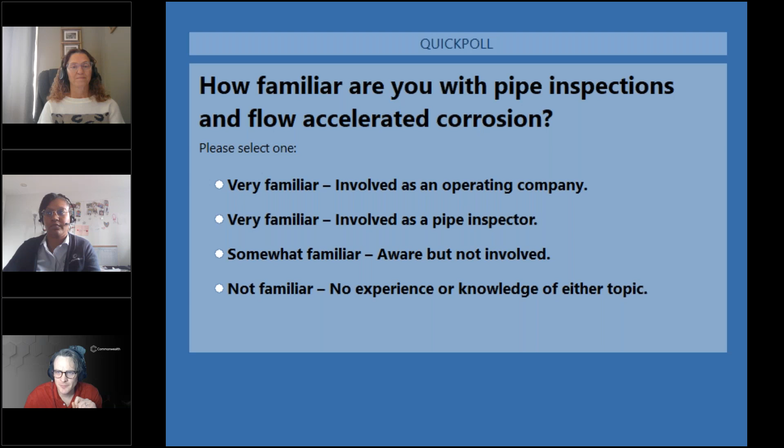With about 76% of our vote, we are going to see our results. We've got about 64% at number one, with somewhat familiar. They're aware, not necessarily involved. 32% of our audience is not familiar, no experience, no knowledge of either topic. 5% say they're very familiar, involved as a pipe inspector, and 0% saying that they're involved as an operating company. So we have a good crowd. This is going to be a great presentation for this audience.

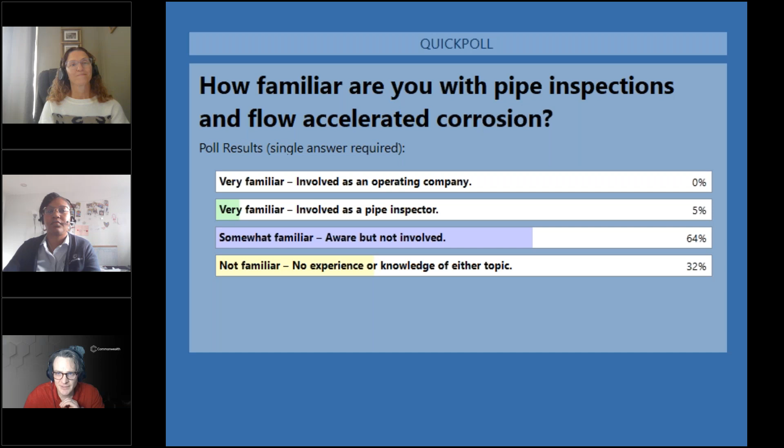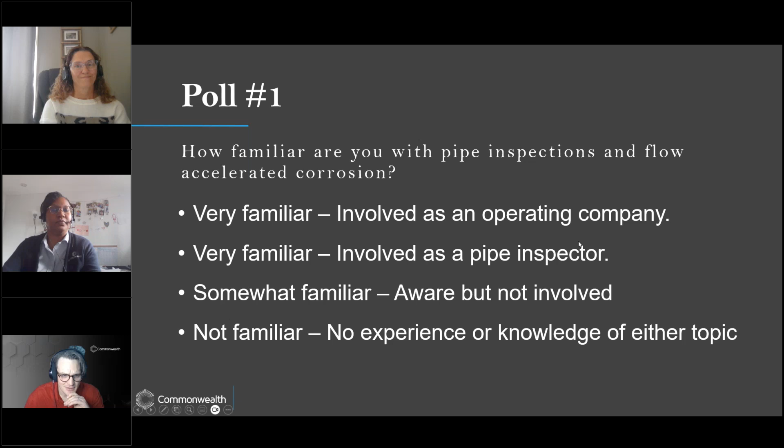I'm looking forward to hearing from Kenya and Kristi. All right, so Kenya, oh, sorry about that. We've got it coming right up to pull up the presentation here on the introduction slide. Okay, there we are. Take it away. So yes, Kenya McKinnon. Hello. Could you do a quick introduction? Tell us, even just what's on the screen. Just say hello to the group here.

Sure. Hi. My name is Kenya McKinnon, and I am a mechanical engineer, oftentimes a project manager in our power generation department here at Commonwealth. I have 18 years of experience, mostly in CHP and combined cycle gas plants. Thank you, Kenya. And Kristi.

And I'm Kristi Vilminot. I'm the Director of Engineering for our Power Generation and Energy Group, as well as our Electrical System Studies Group. I am a mechanical engineer by degree. I have a little bit over 33 years of experience in the industry, ranging from small plant betterment projects up to large combined cycle and coal design projects. I also am currently the chairman of the ASME B31.1 Code Committee, as well as the Vice Chair of the ASME B31 Standards Committee.

Thank you. I'm looking forward to you sharing your knowledge about this committee and pipe inspection in general. So with all that said, I think we're ready to go. So I'm going to hop off my camera, save you all some bandwidth, and Kenya, take it away. Okay.

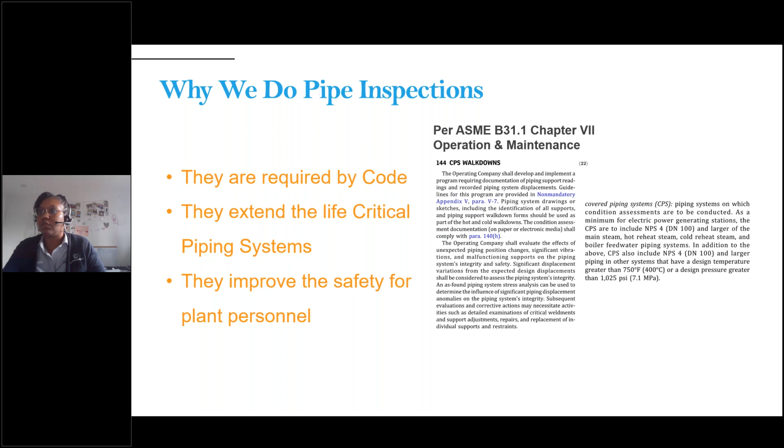Okay, so why we do pipe inspections. Pipe inspections are mandated in the ASME B31.1 code, particularly in the Chapter 7 operation and maintenance portion. And this is, of course, because of safety primarily. Managing safe piping services begins with that initial project concept and design, but it doesn't end there. It's essential that operating companies maintain safe operation of the piping throughout the life of the plant. So therefore, pipe inspections are crucial. Also, identifying issues early extends the life of the critical piping systems.

I wanted to note here that B31.1 does not state a detailed set of operating and maintenance procedures that covers all cases for all plants, but does provide some basic requirements for what they call covered piping systems. So it is up to the operating company to develop procedures for piping systems deemed necessary for safe operation of their facility. And therefore, there could be additional systems beyond these basic ones covered in the code that would also need to be inspected. And Commonwealth is involved in helping clients to develop those procedures.

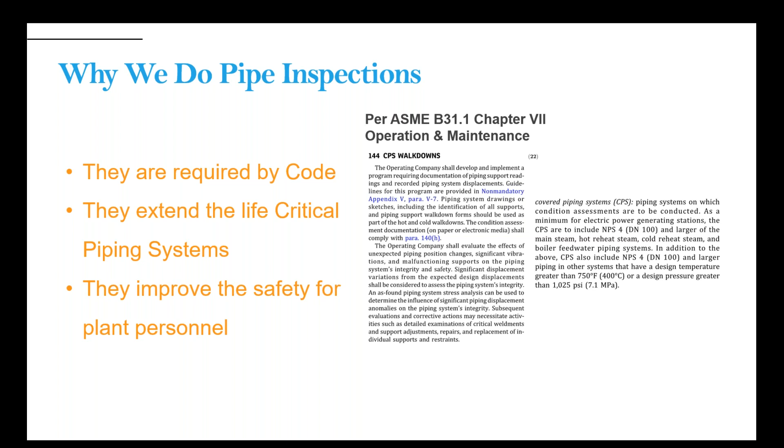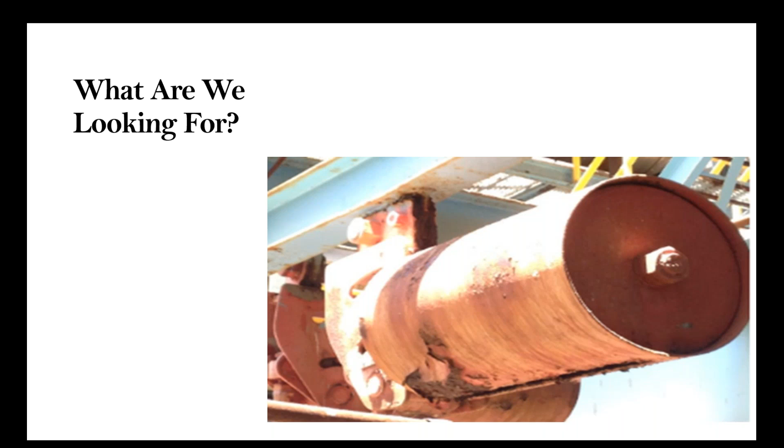The functionality of the support, that could be ensuring rigid bottom supports are resting on steel and not uplifted, and also ensuring rod supports appear to have tension in the rods. The migration of the piping, it's just making sure that there's no unexpected piping position changes, such as piping shoes sliding off steel or bent rods.

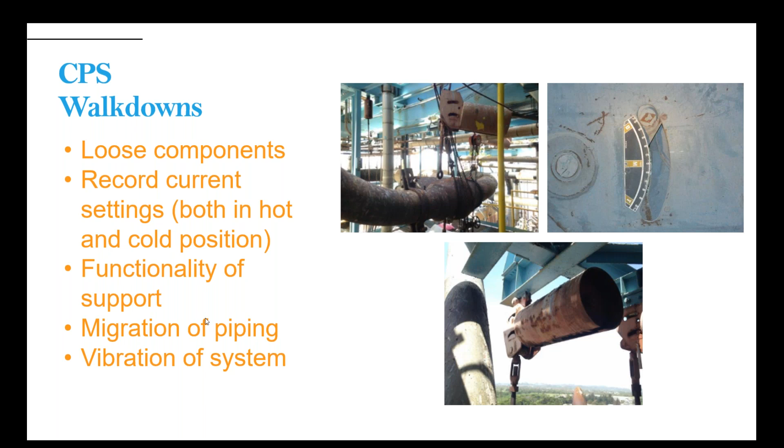Okay, and then the frequency of the inspections. Per ASME B31.1 code, the frequency is up to the operating company, but it is not to exceed a 5-year interval. So some clients have chosen to do 3 or 4 years, but if for some reason the hot and cold walkdowns are not performed within 5 years, the justification must be documented.

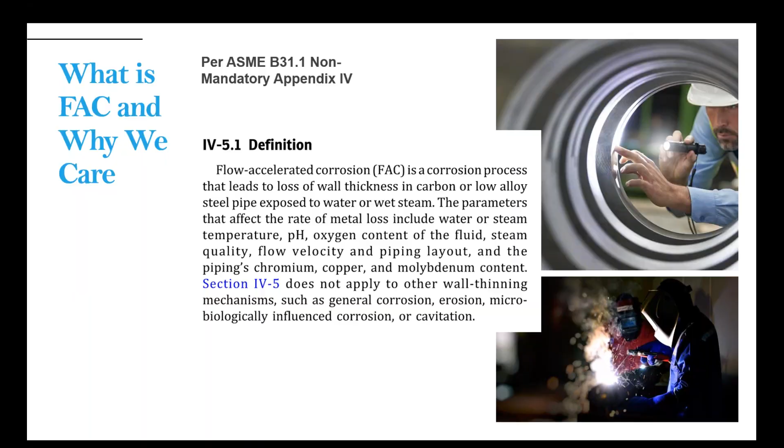They've also added additional criteria as part of B31.1. So if you look at Table 5 in the non-mandatory appendix, it talks about the parameters, some of them that I just mentioned. It actually shows the flow accelerated rate will increase if these parameters exceed or are less than the numbers listed here. So ASME now gives guidance on this.

So your flow velocity, if you're over 10 feet per second for water or 150 for steam, is one of the parameters that's going to lead to this. If your pH level is less than 9.2, oxygen less than 30 parts per billion, your temperature ranges for water or wet steam.

So your critical steam systems don't see this issue as much as the ones that are in the wet steam area, and for steam qualities that are less than 100%. So they give some criteria here. The more parameters that you are checking off that you're falling in that area, the increased risk that your system will have. And some of the systems that typically fall into those categories are your feed water, your condensate, blowdown, if you have a turbine crossover system or an extraction steam, or any feed water heater drains or vents.

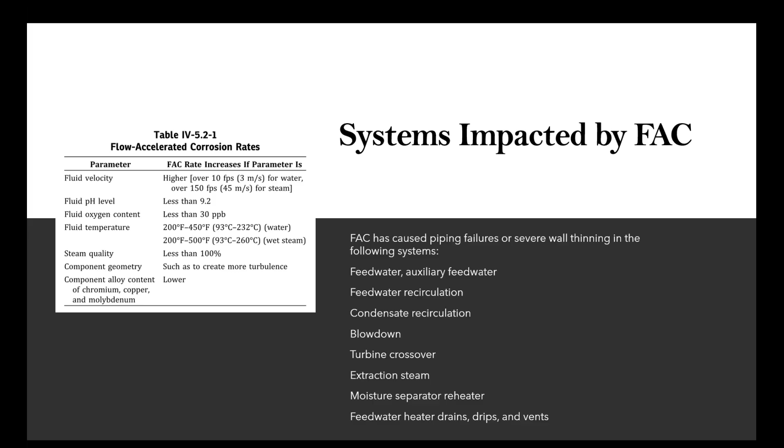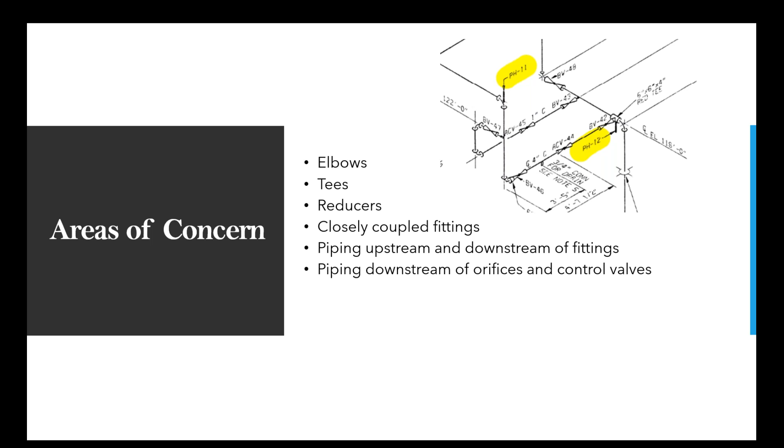There is not criteria directly for methods of detection for flow accelerated corrosion. Some of the methods that can be used are visual, radiography, or ultrasonic. Ultrasonic is the current industry practice. People typically would take ultrasonic thickness examinations, and they would do it in a grid pattern based on the recommended locations of where to take them. And they would identify different reference points for each of the grid intersections. And then if thinning is detected in any of those specific spots, they would refine the grid pattern to be a more tightly represented grid pattern, and then repeat it to make sure that, in that smaller area, you found one spot that had thinning, but how far away from that spot does the thinning pan out?

And then you also need to take that measurement and make sure that that system still has the acceptable wall thickness per paragraph 104 for the minimum wall thickness for your design pressure conditions. And so if it doesn't, there might be a cause to downgrade your design pressure that you're using for your system prior to the time that you're able to replace that piping. Or if you are still within the wall thickness, then you would need to set up a program for how quickly you're going to repeat the detection to make sure that you're still staying within a safe wall thickness for the safety of your plant and those that are operating it.

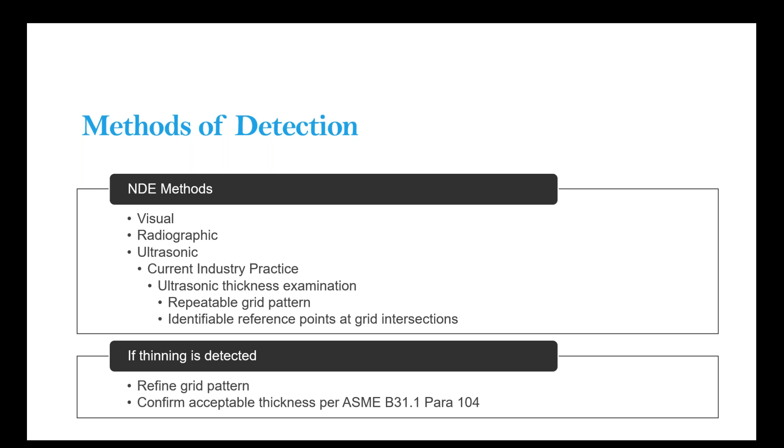So while we wait for that, my question for you two is, when it comes to this whole situation on piping and corrosion, what do you hope is the biggest takeaway? If we have a lot of folks here that are aware but not fully involved in the process, what is the one thing that you feel that people really need to know? Like, you gotta know this. What is the big number one takeaway conversation that needs to happen in this case?

I would say that my big takeaway is to make sure that you're performing your inspections at your plant. It's the easiest way to maintain the safety of your systems, the long-term operation of your plant, and the safety for those involved. I'm sure if you are working in a current steam plant, one of the first things I was told when I started my job is that steam can be dangerous.

You could walk around with a broom in front of you and if the steam hits that broom, it's going to cut it. I've never seen somebody walking around with a broom in front of them in a plant, but it is a very dangerous mode of creating power if there is a leak. It is extremely dangerous. You can't see the steam leaking across the plant.